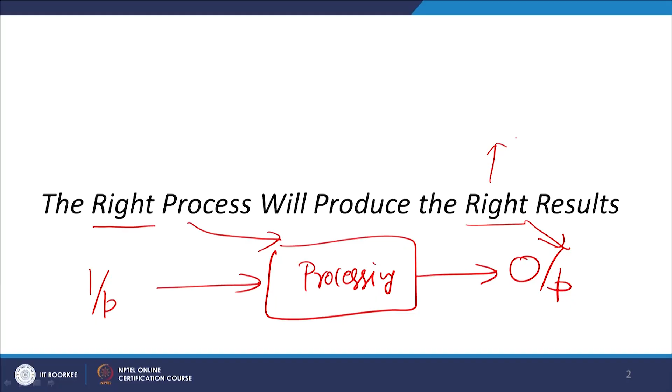The right result is in terms of good quality. We have already discussed it in the form of the house of Toyota, where we have 2 pillars and the roof of the house, and in that roof we mentioned good quality, low cost, faster delivery. These are some of the results which we are expecting from our process, and for that purpose we need these 2 pillars. This is the long term philosophy, that is the foundation, and these 2 pillars where you see how you are eliminating waste, how you are following the principles of Kaizen, how you are able to achieve JIT, because that is not the end.

It is also very important to understand this misconception: if we are able to implement JIT, we feel that we have achieved success, we have achieved excellence. If I am able to eliminate waste, we feel that we have achieved excellence. No, these are just the means, these are part of the process. The final objective is to achieve good quality, lower cost and faster deliveries. These are the ultimate objectives, therefore, these are part of my roof.

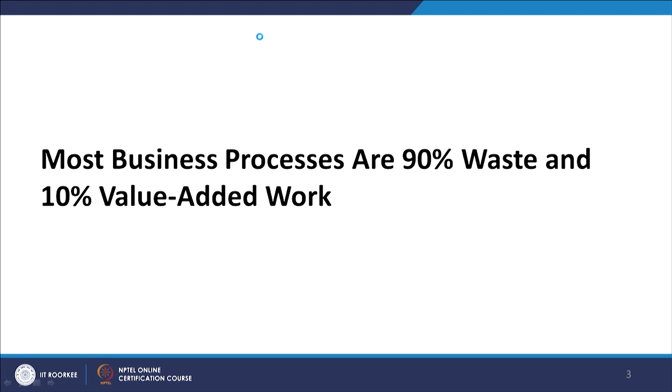So, the right process will produce the right result, that is what Toyota says, and that applies anywhere, not only to manufacturing or service organizations, but in our life also. If we follow the right process, we get the right output, the right fruits of those processes. Now, another important thing to which I would like to draw your attention is that most business processes are 90% waste and 10% value added work. This is as per Liker, the author of the popular book, The Toyota Way.

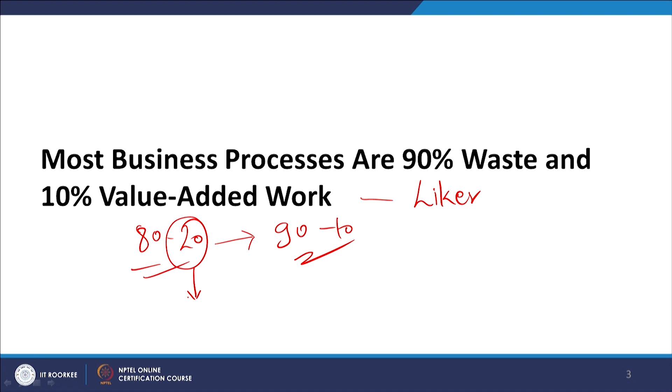Now, in life we know the principle of 80-20, and Liker has gone slightly to the extreme side, changing this 80-20 into 90-10. With 80-20, we all know that most of the time only 20% of things are contributing to the final output, and the remaining 80% are not going to contribute to the final output.

In India, for example, JEE, the Joint Entrance Examination, is one of the most competitive examinations, and every year lakhs of students appear for it. All those lakhs of students are not in competition with each other. Out of that large number of students appearing for the JEE examination, the competition is between only 20% of students, and the remaining 80% are crowd.

They are not part of competition, they are just increasing the number. In our organizations also, we see that 20% people are actually contributing to the growth of the organization, and the remaining 80% people are simply, you can say, a liability, or they have no specific role in the growth of the organization.

Same thing Liker mentioned with respect to the processing part, that 90% of the activities or 90% of the resources which we consume are for wasteful activities. Only 10% of resources are for value added activities. This is a very significant aspect. If you can change this ratio from 90-10 to even 50-50, you can be a highly competitive organization, where only 50% of the resources are wasted and the remaining 50% are used for value added activities.

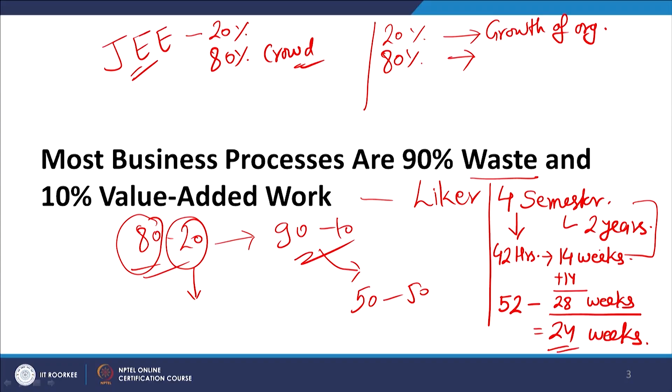For the remaining 24 weeks, which is almost 50% of the time, he is not in the academic environment. Some may go for practical activities or projects, but if that is not part of your curriculum, no proper value is being added during those 24 weeks. That is a very significant live example of how much waste we are creating in a 2-year MBA program because of this limited use of time.

The same thing is happening in organizations also, where a large number of activities are wasteful activities where no value is being added, and only very limited processes are helping in value addition. Going further into this discussion, a good place for any company to begin the journey to lean is to create continuous flow.

As we have discussed many times, the Toyota production system is basically a journey towards lean manufacturing. So, the starting point of being a lean process is the creation of a continuous process flow system. That is the starting point of the journey towards leanness. How does it happen? Wherever applicable in its core manufacturing and services processes. Whether you are a manufacturing or a service organization, start working on continuous flow, so that something will be produced from your system regularly.

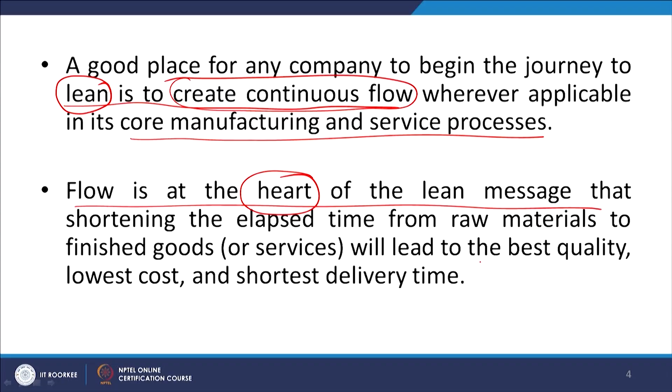So, the idea is how to shorten, because on-time delivery, delivery within limited time, is a very important aspect. That is possible only when you have a continuous process flow. That is where we say that it is the heart of the lean message, and it helps you in shortening the process time from raw material to finished goods, and it also gives you the best quality, lowest cost and shortest delivery time. All three objectives which we discussed in the form of the roof of the TPS house are possible when you are able to design a proper continuous process flow.

And the extreme case of continuous process flow is when we are able to create a single piece flow. Single piece flow is the ultimate objective of this continuous process flow system, that we are able to design a process system where a single piece is able to move from input to output stage.

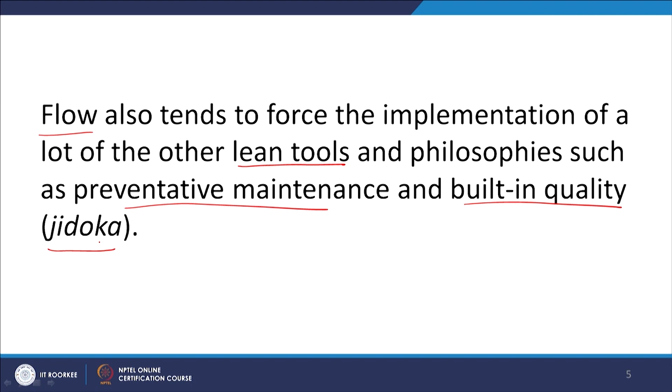Flow also tends to force the implementation of a lot of the other lean tools. Because of flow, you are able to implement various other lean tools also, and one of them, which is one of the pillars of your Toyota Production System house, is preventive maintenance and built-in quality, which we also know as JIDOKA. If you recall these two pillars, which we discussed in one of our sessions, one pillar was focusing on JIT and another pillar was focusing on JIDOKA,

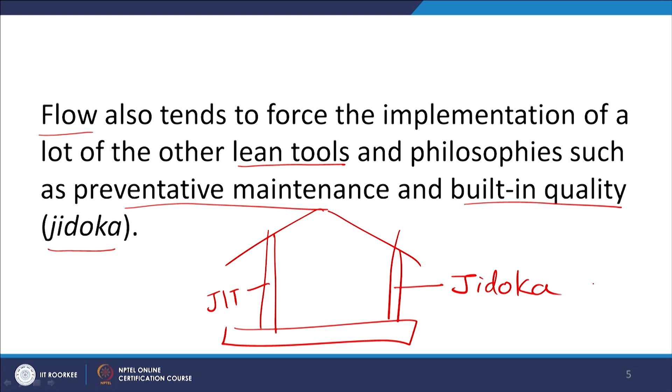and JIDOKA is basically built-in quality, that our process should be capable enough to take the responsibility of its quality. If I am producing something, I do not require any external check for checking my output. I have that built-in mechanism to check the quality of my output. So, that is JIDOKA, and for a lean system it is very important, because if at any time some failure comes at a particular stage, it is going to disturb my entire process, because I do not have inventory. So, I cannot absorb those faults.

If some fault or defect occurs at any stage, maybe in the machines, maybe in the product, this is going to affect my entire process, and therefore, whenever there is a maintenance issue or a defect, it creates a lot of urgency in the Toyota Production System, in a lean manufacturing environment. While in a mass manufacturing or batch manufacturing organization, that type of urgency may not be there, because there we see things in totality. Here we see things on a regular basis. So, a lot of urgency is there in a Toyota kind of environment. So, all these tools become possible because of the approach of continuous process flow systems, preventive maintenance and built-in quality. That is a very important thing for this TPS house.

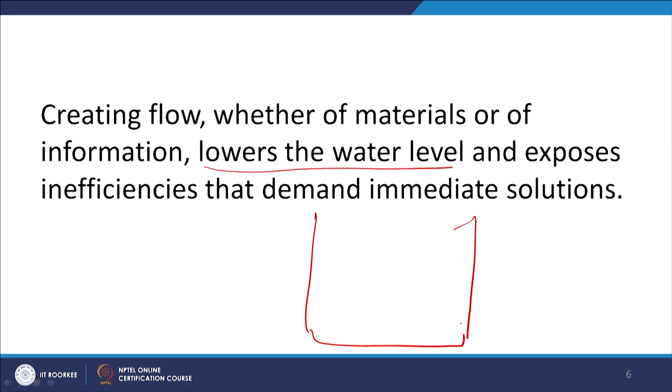Now, suppose you have a container, and in that container there are certain sediments. Now, if you have the water level up to this particular point, number 1, those sediments are not visible, and you will not be able to understand that the capacity of this vessel is reducing because of the formation of these sediments. Because from the top you are able to see water, everything is okay, enough water is there, and you keep working with that.

When you reduce the water level, when the water level comes to point number 2, this sediment which is there becomes visible only when the water level is reduced to point number 2.

And now when you see this sediment, you will immediately take some corrective action to remove this, so that it should not reduce the capacity of your vessel. You want full capacity of the vessel, you want this vessel for storing water, but if many such sediments are there inside this water, it actually reduces the capacity of your container.

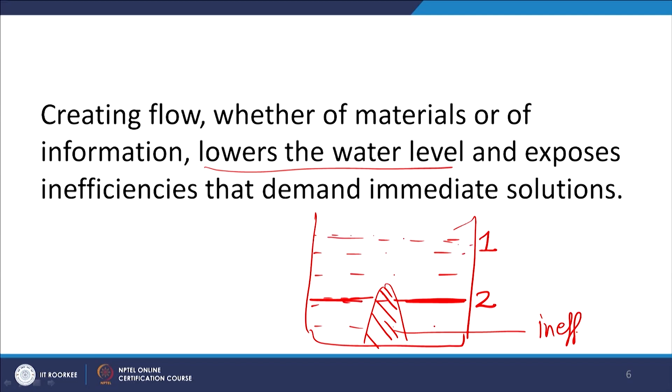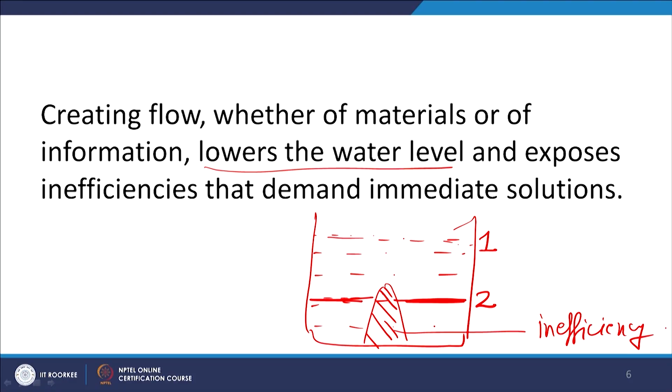So, therefore, you need to see that there is a provision that if excess inventory is there, many such problems, this is an example, but in reality if you have the water up to point number 1, many such inefficiencies, this you can say is inefficiency. These types of inefficiencies are not coming to the surface, and therefore, you will not be able to see them, you will not be able to take corrective actions, and finally, you will work with less efficiency.

But when you reduce the inventory, when you are able to see those problems, obviously you need to fix those problems, and therefore, creating flow will help you in identifying those inefficiencies in your system and take some kind of solution that demands immediate solutions. So, if these types of sediments are there, if these types of inefficiencies, problems, issues are there, then you will solve those issues on an urgent basis.

Now, many a times, because assembly line and mass production were very important milestones in the history of manufacturing, most of the organizations are very much concerned with this philosophy of mass production. Now, in mass production organizations, two things are very important, why mass production is so successful. In that traditional thinking of mass production, one important thing is economies of scale. So, your efficiencies, that is one very important thing that we feel gives us lower cost.

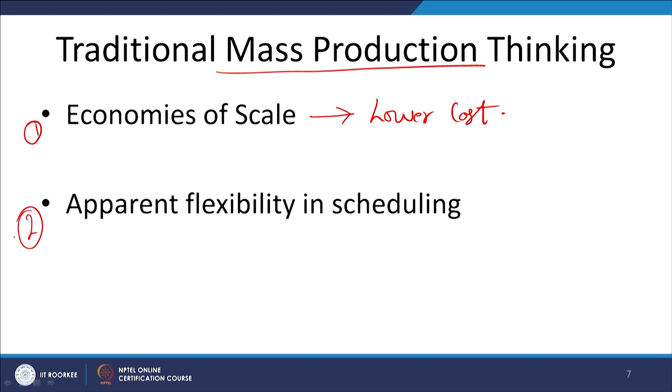And the second thing is, we believe that it helps in some kind of flexibility in scheduling activities. I say that it is apparent flexibility in scheduling, actually it is not so, but since you have produced a batch, a good quantity of a particular intermediate component at A, then at B you have another machine, at C you have another machine. Now, you have a batch of products available here, and then this machine is free. Once this batch is completed, this machine becomes free for, let us say, 2 weeks, because the next batch will come after 2 weeks.

So, it looks like you can use this machine for 2 weeks for some other product also. That is the idea of apparent flexibility in scheduling, that the same machine can be used for different types of products, because on day 1 you have a batch of a different product, on day 2 a batch of a different product, on day 3 a batch of a different product. So, because of that you enjoy this apparent flexibility in scheduling.

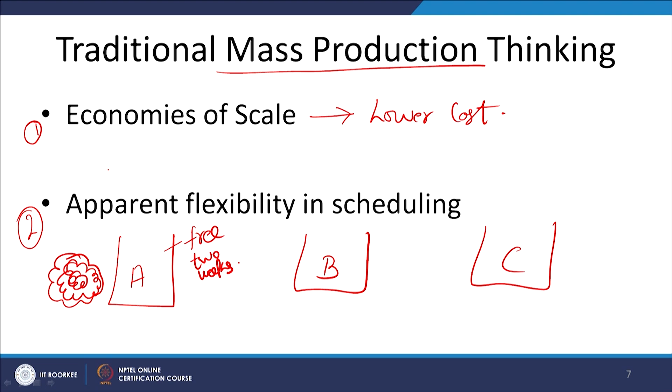So, these are the two primary ways of appreciating the traditional way of mass production. One is related to efficiency and then the flexibility, though actually speaking this flexibility is just our way of thinking, apparent flexibility. The actual flexibility is not that much possible, which we will see is possible in case of a continuous production system.

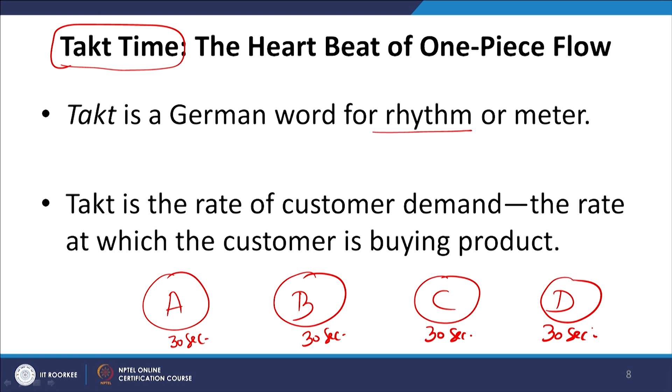Now, we move to a very important terminology, because when we are trying to design a continuous process flow system, this term takt time is very important. It is a German word which is used to define rhythm. When we are developing this continuous process flow system, we need a system where every process takes almost a similar amount of time. If A, B, C, D are 4 processes in making this product, and this process takes 30 seconds, I need to design that each of them takes 30 seconds. And this figure of 30 seconds comes because of takt time.

Now, what is it in terms of our operation systems? The takt is the rate of customer demand. Let us say I am selling 1000 products per month and I am working for 25 days in a month. So, how many products am I selling? I am selling 40 products per day for these 25 days, and in each day I am working for 8 hours.

So, per day working time is 8 hours, and in 8 hours I have to produce 40 products. So, 40 products per day, and 8 hours are the working time. So, you can say that in each hour I have to produce 5 products. In each hour, which is 60 minutes, 5 products.

So, after every 12 minutes one product should come out of this system. When I am saying that one product should come out of the system after every 12 minutes, that 12 minutes becomes my takt time: there is a demand for a product after every 12 minutes. So, in that case I will design my system so that each process takes 12 minutes, so that after every 12 minutes there is a new product ready, and as soon as that new product is ready, there is also a customer to purchase that product.

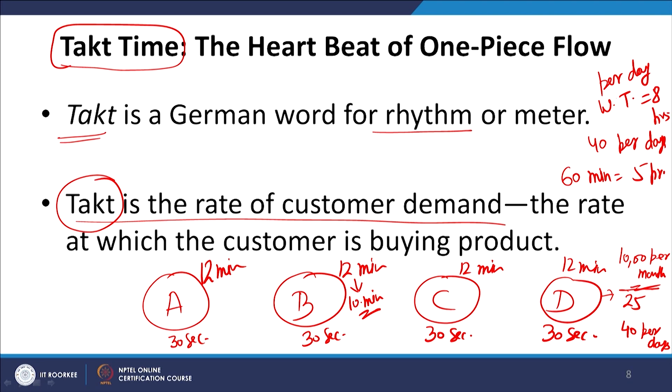this similar time. If one stage, for example B, becomes very efficient, so in place of 12 minutes it takes only 10 minutes, because B is a very efficient stage. Now, what will we be doing? We will disbalance the entire process, because it will create faster output, and that faster output will go to C, but C is already working. So, that output will be in the waiting stage. So, I am starting to produce waste, where that efficiency is creating waste.

So, I need to see that there is no extra emphasis on the efficiency of a particular station. I need to work for the efficiency of the entire work process simultaneously. If there is one superman in my system, that superman is more dangerous than many normal persons working at the same pace in the organization. So, that is one important thing: the takt time becomes the important element for designing the system.

Now, let us quickly see what are some other benefits that are forcing us to go for a one piece flow system. Mass manufacturing is one way of manufacturing, one philosophy of manufacturing. Now, from that philosophy of mass manufacturing to a one piece flow system, why do we want to move? Because it is helping us in achieving Jidoka. It is giving you the option of built-in quality.

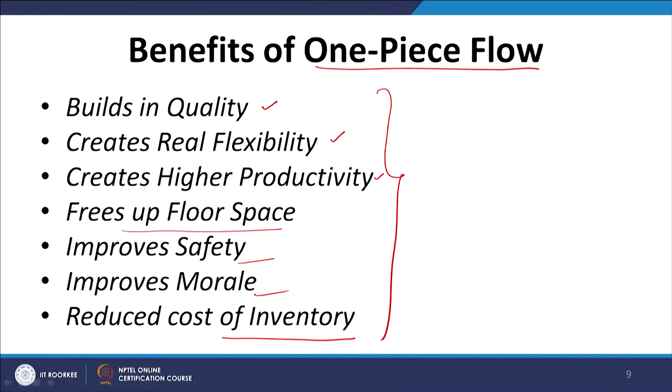So, these are the benefits because of which the idea of a one piece flow system is being recommended over mass manufacturing. And in our coming classes, we will see with the help of examples of Toyota and other companies who have implemented this idea what type of benefits, in terms of some key indicators, they got by implementing this one piece flow system over the traditional approach of mass manufacturing.